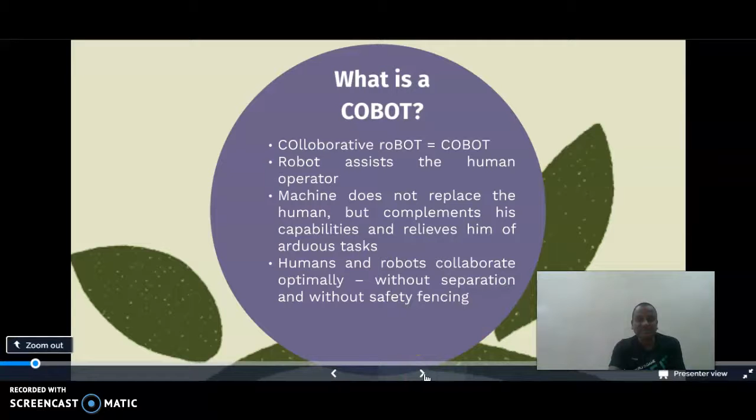In case of a cobot, the human and robot are going to collaborate optimally. There is no need for any separation of areas, or any fencing. This is a very big difference between a robot and a cobot - a robot replaces a human, whereas a cobot is going to collaborate with a human. In case of robots, we need a lot of fencing and separations, whereas in cobots there is no need for such a thing. So that is the basic about what is a cobot.

And what are the advantages offered by the cobot? The first advantage of using the cobots is the flexibility is increased in production, and the employees are relieved of performing the ergonomically difficult or unfavorable tasks. Hence we can see that there is a large reduction in the injuries and infections happening to the workforce, and we can achieve high quality of performance here because there is no need for a type specific or component relevant investment to be made.

The other advantage is we can increase the productivity and the system complexity can be reduced because these cobots come with integrated sensors.

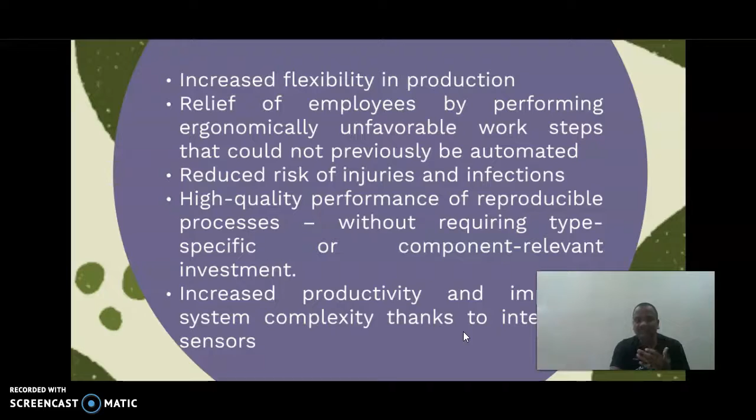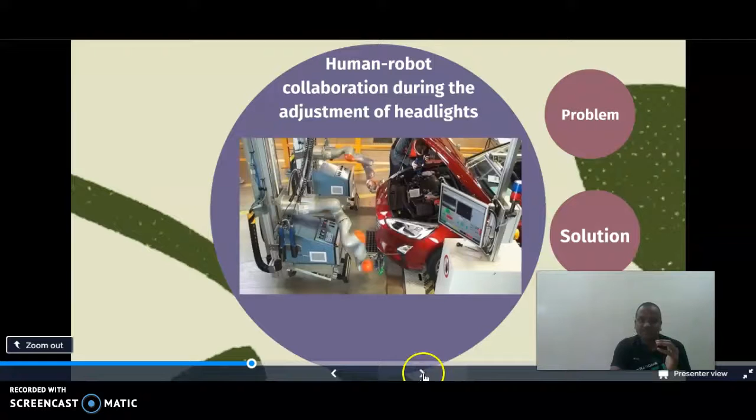Now we are specifically going to look into a case study where this human robot collaboration was used by Ford for adjusting of the headlights. This figure shows how two KUKA robots were used in Ford to achieve this headlamp adjustment. So this is the description of the problem.

Whenever we have an automotive industry, the vehicle fog lights have to be adjusted - both the fog lights as well as the headlamps. Adjusting these fog lights was previously being carried out by human operators. The difficulty here is that while the vehicle is stood over, the human operator searches for the hard to reach openings for adjusting the screws in the bumper area. This is a very big problem here.

Once he finds the area, he has to use his tools and adjust the screws. The difficulty here is that while doing these adjustments, if we apply a bigger force, the bumper can get damaged. So this is a very big problem in automotive industries.

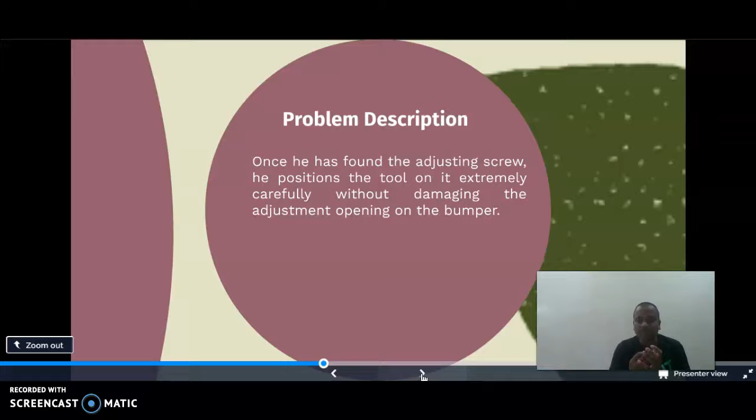And a solution to this was Ford. What they did at Ford is they used two KUKA LBR iiwa cobots for performing this unergonomic task of adjusting the fog lights. For adjusting the fog lights, they used these two KUKA cobots, and in parallel to this, the human can adjust the main headlights. That is what we mean by collaborative robots.

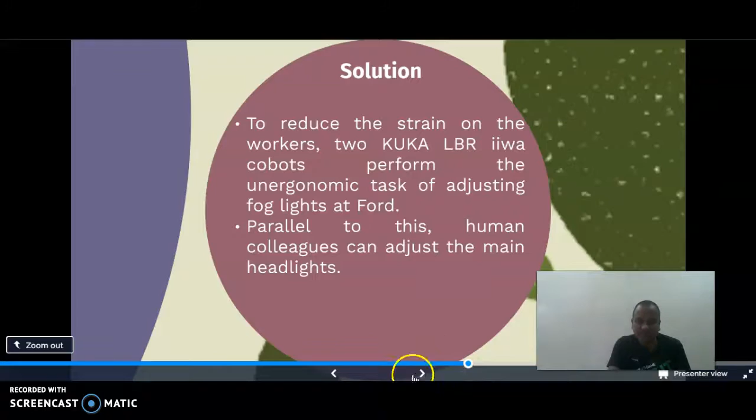So the robot will be performing adjustment of fog lights. At the same time, human can be involved in adjusting the headlights. That is the biggest advantage of going for cobots.

And here is a small video that demonstrates how at Ford they use this.

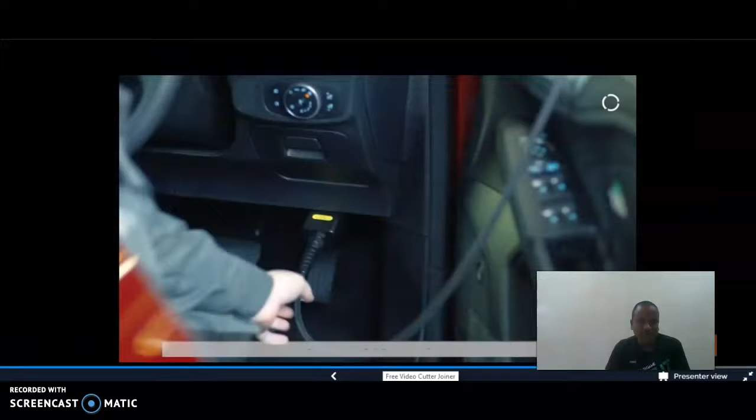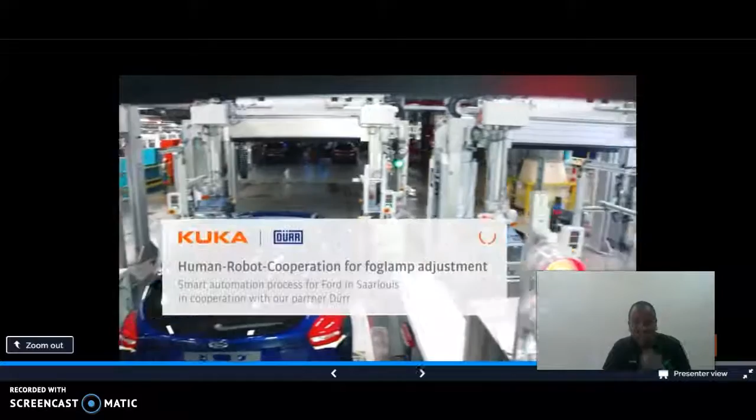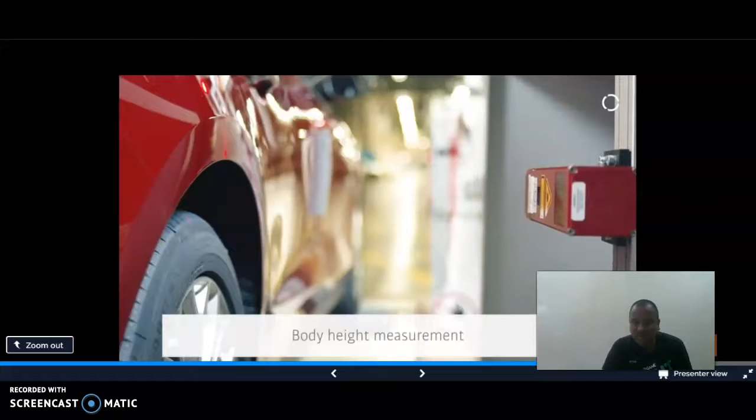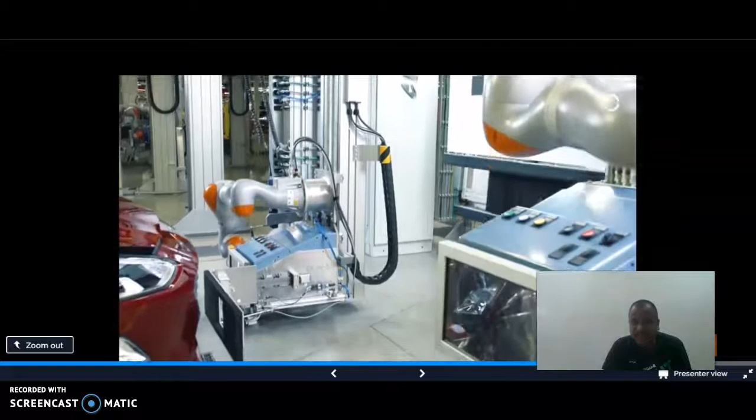This is a human robot cooperation for fog light adjustment. We can see that the vehicle is entering the garage. We are connecting the OBD interface, and we have the automatic vehicle centering system. Then we have the body height measurement system, and here we are doing certain calibrations - first the ACC radar calibration, and second the front camera calibration.

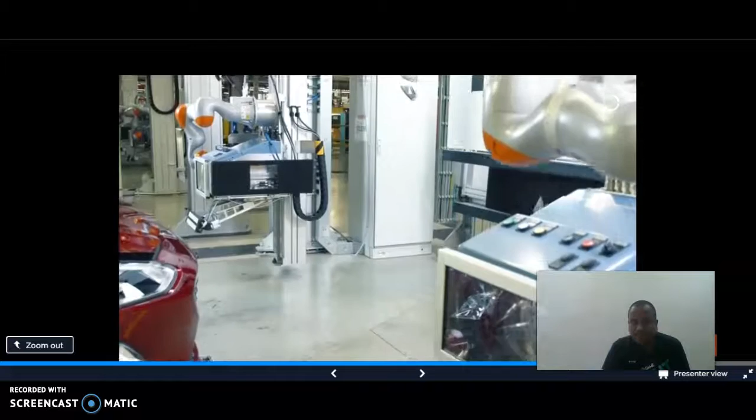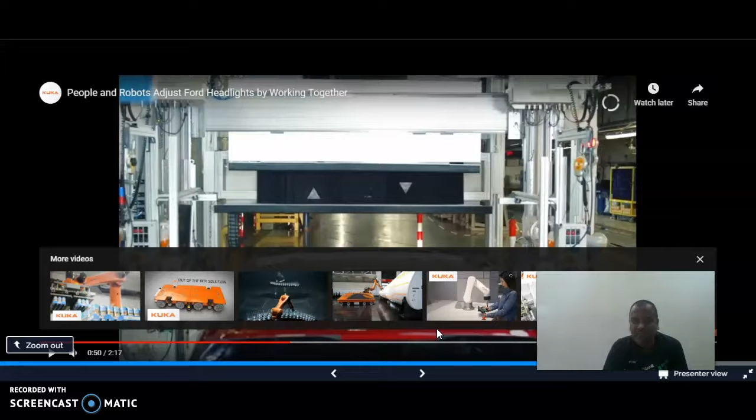So all these adjustments - height, finding the height, the camera adjustments, all these calibrations - are done to ensure that, because we have many number of vehicles coming into the garage, right? Different vehicles will be having the headlights positioned at different heights. So for that we are doing all these initial adjustments.

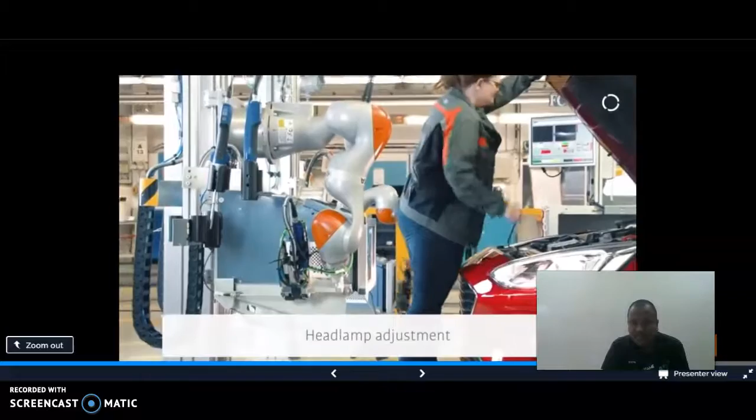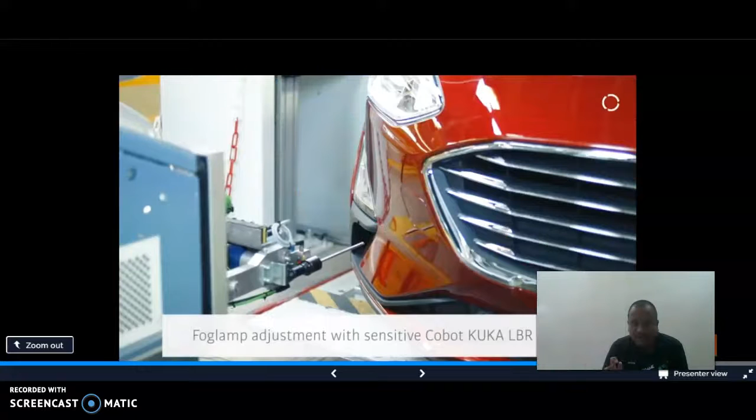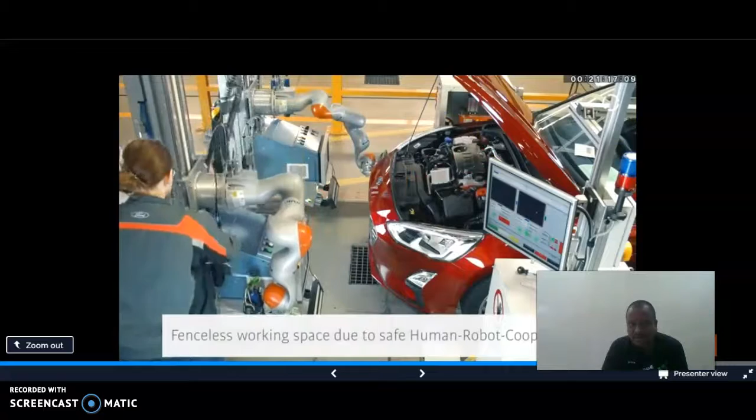We can see here that the headlamp adjustment is being carried by the human operator, which is quite easy. The human operator is adjusting only the headlamp, whereas the fog lamps are being adjusted automatically by the two KUKA robots. First they position the screwdriver, then they go for adjusting the screw. This is a very sensitive mechanism. We can see that the two operations have happened in parallel, right?

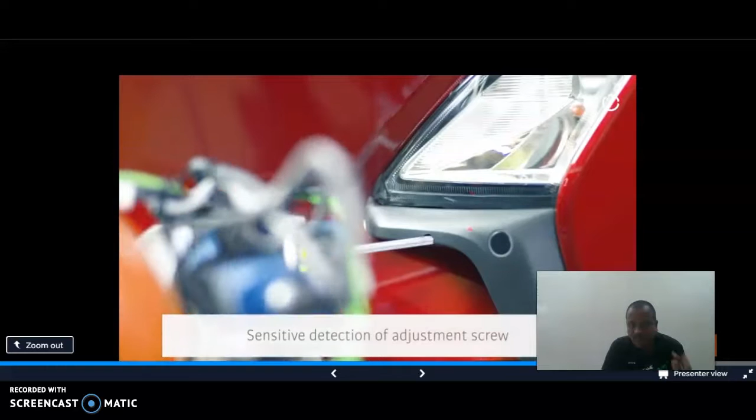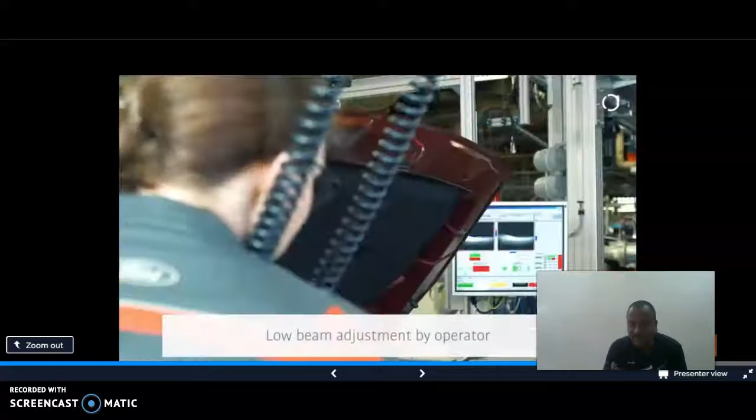One KUKA robot had already adjusted the fog light on one side, whereas the human was adjusting the headlamp. Now the other side is being adjusted by the human and the robot.

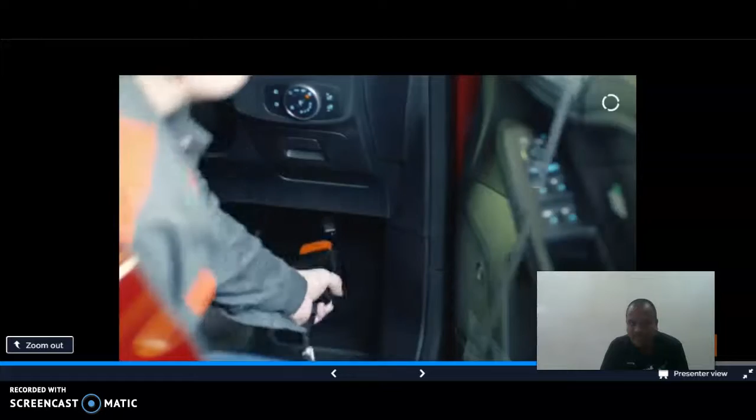Once the work is over, we can unplug the OBD interface, and that's all.

So that's how this KUKA robots work. As we could see in the video, it was pretty clear that two operations were happening in parallel, right? So on one side, let us say the right side, the headlamp was adjusted by the human, whereas the right side fog light was being adjusted by the KUKA robot. So these two operations were happening in parallel.

Then the human operator went to the other side. The operator was adjusting the headlamp there, and at the same time, parallelly, the KUKA cobot was adjusting the fog light.